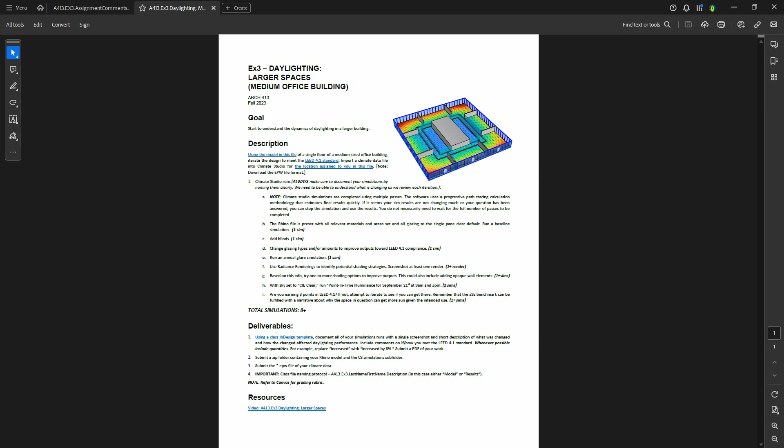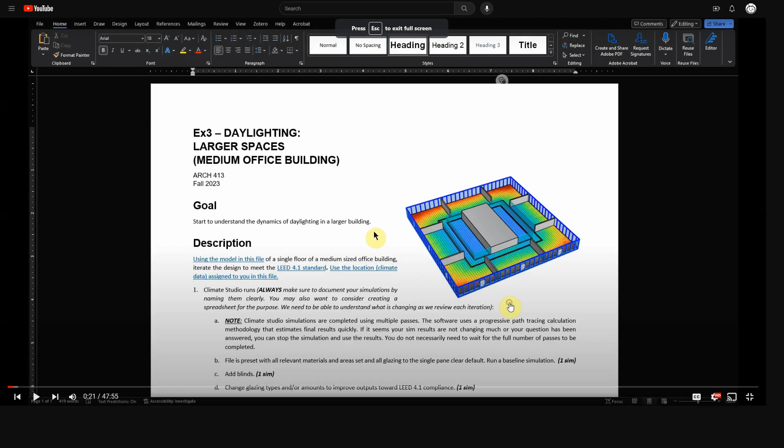What I've done to try to make this straightforward is two things. I am giving you every week as detailed as I can a set of assignment instructions, and so far at least I've given you a video you're supposed to watch beforehand. This is why I'm somewhat confused, because if I look at this video, I start with the assignment and go through and talk about pretty much everything in detail.

And I actually do it. That was the point, I'm actually doing a step-by-step run through this assignment, so you could just open up your file and do this with me, and you should do really well if you did that. So you have to let me know why that isn't working or what's confusing about that.

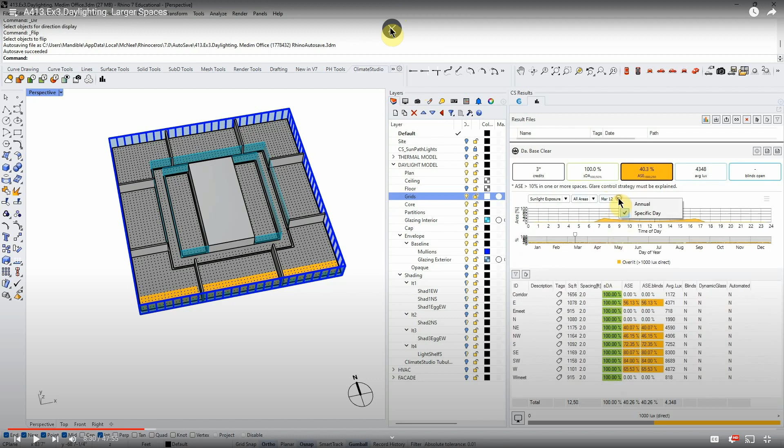Having said that, let's just try to dig into this a little bit. And the other thing to remember is that every assignment already has a grading rubric with it, and these are directly tied to the assignment itself. So if you look at these both together, it really should help you understand what's going on.

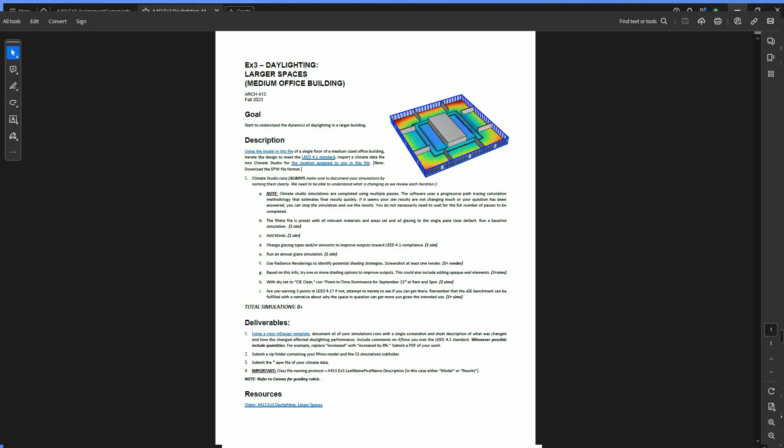The idea for this class, I think the only way it can really work well is if you watch the video before class and try it before class, or at least look at the assignment and see if you understand what you're going to be doing. That way you can ask me these questions in class, and we can have a back and forth discussion. That's what it's supposed to be, right?

If people aren't watching the video and trying it before class, then I am showing them something in class, and I'm not even going over the whole assignment because I've already done it on a video, and I figure that's really boring. Then you're missing important information, I think.

So I may decide to switch that in mid-semester here, because there are other people who are not watching videos before class, so it's not completely working the way I thought. I may adjust it, and you should let me know. I can change it, however, to help you make our class time really productive.

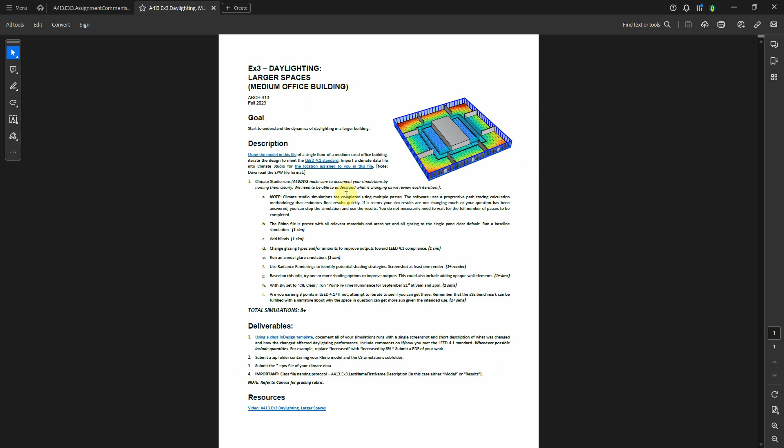Anyway, so I'm looking at the assignment, I look at what you turned in. There's definitely some things in here that are right, but a lot of it's not directly connected. I think there's maybe a source of confusion that I would understand if there wasn't a video, because you're just doing a number of simulations and they're not inaccurate.

I can tell that you know what buttons to push in Climate Studio, but they're not following this order, first of all. So I would suggest you just look at the order that's in the assignment if you're struggling with this, and just follow along and try to do it step by step. And if you're watching the video, then that's going to be what I'm doing there too. So it should be pretty clear what I'm asking for.

But so let's go through this. I'm sorry this is a little bit long and boring, but I'm just trying to answer your question. So you downloaded the file, and I try to make a goal, start understanding the dynamics of daylighting in larger buildings. We did smaller buildings the week before. You downloaded the model, good. Included this here, this is the second week I would have been talking about LEED. This is what we're doing.

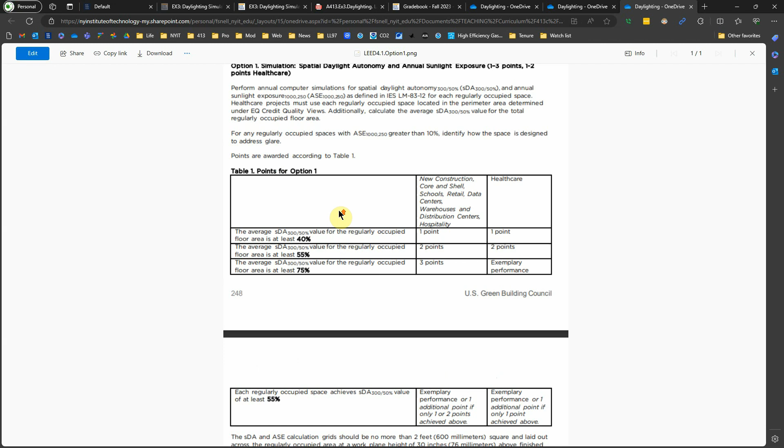This is a simple chart from LEED, but this is what we're doing from LEED 4.1. We're trying to meet the daylighting requirements, and there are two basic requirements: SDA, do we have enough sun, and ASE, do we have too much? We're trying to get 75% SDA and less than 10% ASE in all spaces.

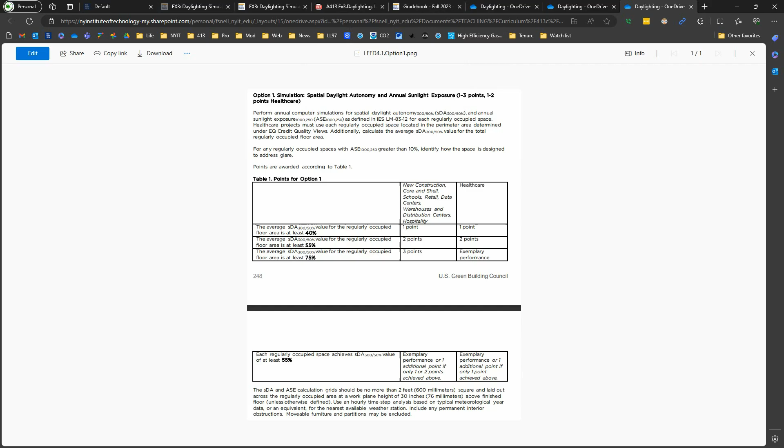So we need to see the numbers and not just the colors. That's one thing. And then, so we're going to the standards. That's always what we're doing. There's a benchmark we've got, and we're modeling to that.

I do see that you went and got your location from this file, so that's great, and I can tell you did that because you have Los Angeles here. However, you don't say anywhere that you're in Los Angeles. You don't make that clear. Remember that this is a presentation, not really notes for me. It's supposed to be a presentation where anybody could find this on the street and understand what you were doing. So it should be clearer that you're in Los Angeles, with a map or something, some way that we know what's going on here.

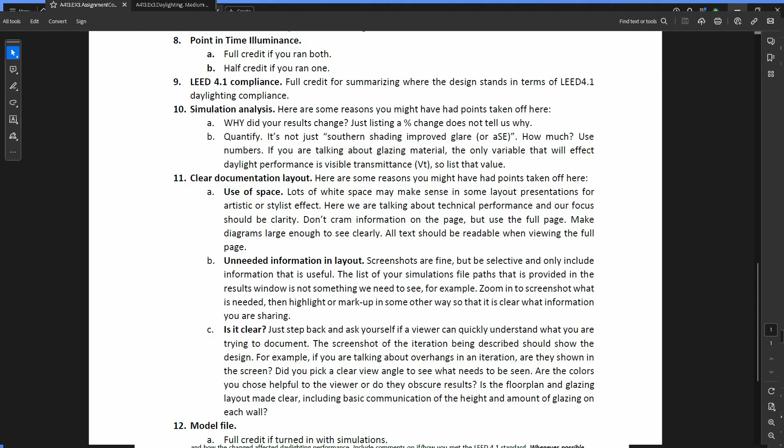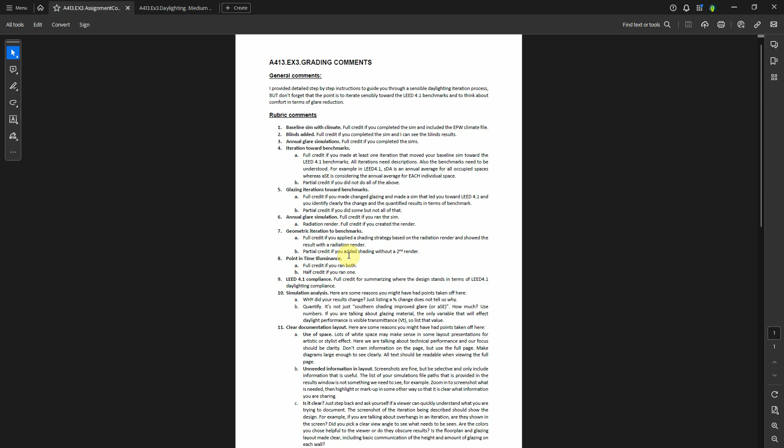I'm burying you guys in documents, so maybe that's too much. Every week, I'm not always going to do this. I'm not guaranteeing it, but when I'm grading, I've been making a list of comments. So rather than repeating the comments over and over again, I'm just making a master list and giving this to you on Canvas so you can see why I might have taken points off.

But one thing that's being repeated week after week is this documentation section. I'm actually being really lenient in grading documentation, but it's important that you start thinking about this. Definitely, this is really important.

Unneeded information in layout—if there's stuff that's not needed, that's just there because it was easier to screenshot, or if you don't understand it, never include anything in documentation that you don't understand, because then somebody's going to ask you a question about it, and then you really lose all credibility when you can't describe the thing you actually put on a slide, right?

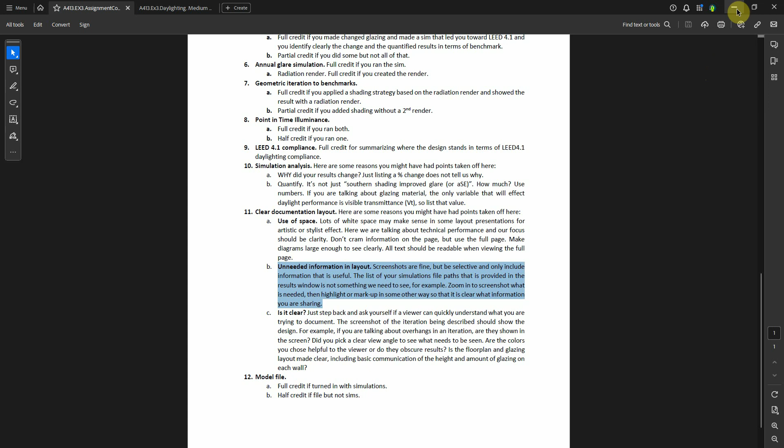I've got this list of simulations that I'm expecting to see, step by step. I would go step by step here. It seems like maybe you were confused when I say you're supposed to do a baseline. Let's see—it says here, run a baseline simulation. That's the first thing you're doing. And I'm thinking you're going, well, which is the baseline of what? I don't understand which one I'm doing, so I'm just going to add a bunch of stuff in here.

That's where if you would have watched the video and looked at the assignment before class, which is what I'm asking—no books, no reading assignments, that's the assignment for the week in addition to whatever exercise you're working on from the previous week. If you would have done that, I think you would have understood what I'm saying here, and what's spelled out here is that this is a LEED 4.1 simulation we're doing.

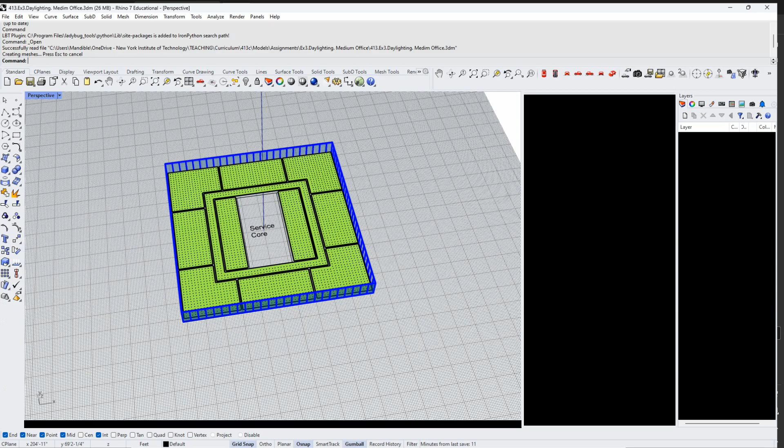So how do we do LEED 4.1 simulations? Well, that is this—there's a very specific way we do it. We go to daylight availability, and in daylight availability there are a number of options we could pick, like daylight factor, but we're picking LEED 4.1.

If I look at the LEED 4.1 runs that I did, because I just did this assignment in a simple way, here's my LEED 4.1 analysis, here's SDA, here's ASE, the things I was talking about, here's my credits in LEED. I've talked about this in some detail, but we could talk about it again if you don't get it yet—how this works, because for example, this is an average over all spaces, and this is for individual spaces.

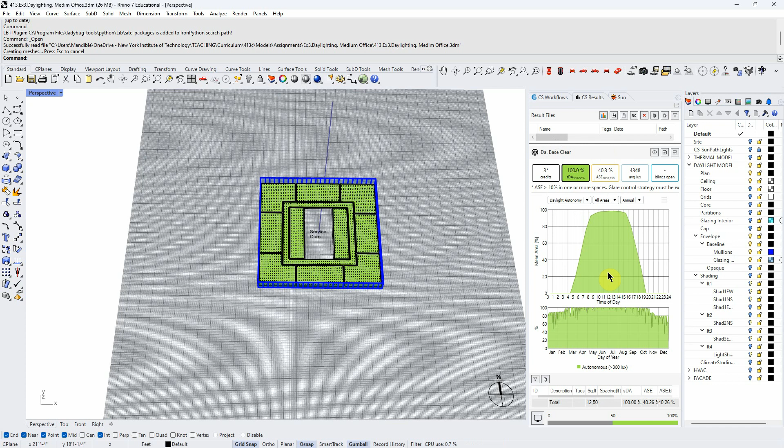So you would want to come down here and look at the percentages for individual rooms. That's not made clear in the assignment because that's things we're covering in class, and the assignment would be 50 pages long if I talked about every single thing in that detail. So my point is, if we go back to the assignment instructions, you were supposed to do—and remember, I did it in this video, I went step by step—if you follow that process, I'm not going to abandon you.

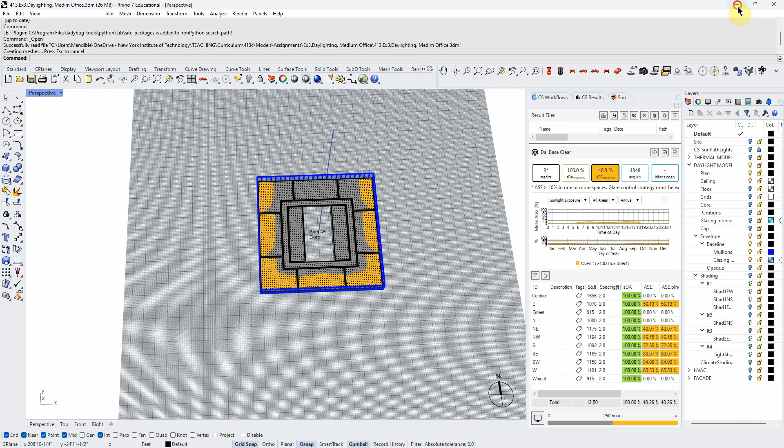So it's kind of clear from looking at this that you're not getting the baseline of what we're doing, which is fine. That's why I would hope you'd watch the video and then talk in class about it. You've got to be interactive with me with this stuff, or you're going to be confused.

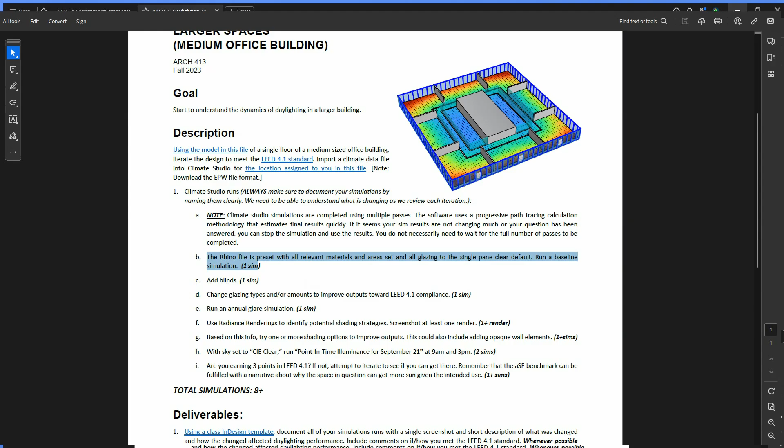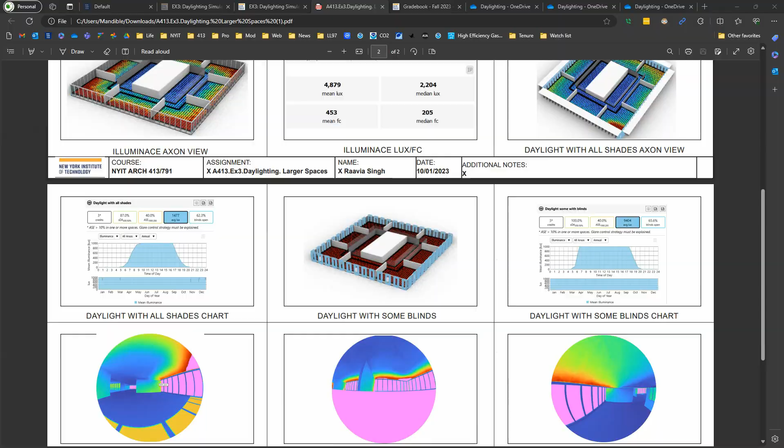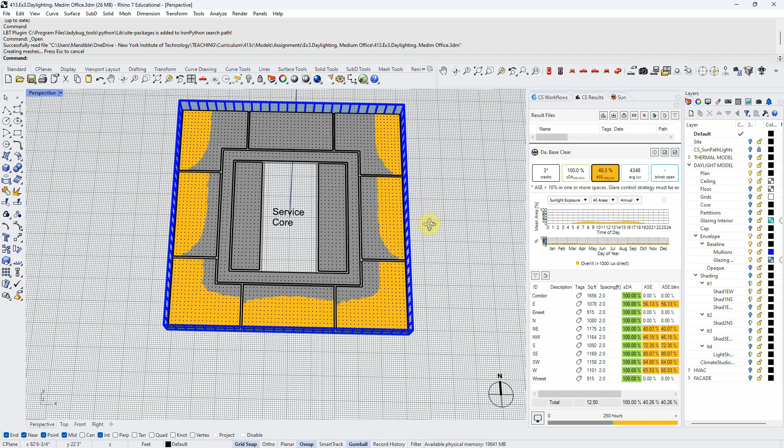What I'm looking for here is that you would run a baseline LEED analysis with the building just like it is, no shading or anything like that, and come up with a value. Yours is going to be different because you have a different climate. I'm just doing New York, and that's why I picked all these different climates, just so we would have some variety. And then we get a baseline. So this is the baseline I ran, and you might look at it from here.

SDA, do we have enough sun? Yeah, we have tons of sun, but we have way too much in a lot of rooms. That was the point. That's the baseline.

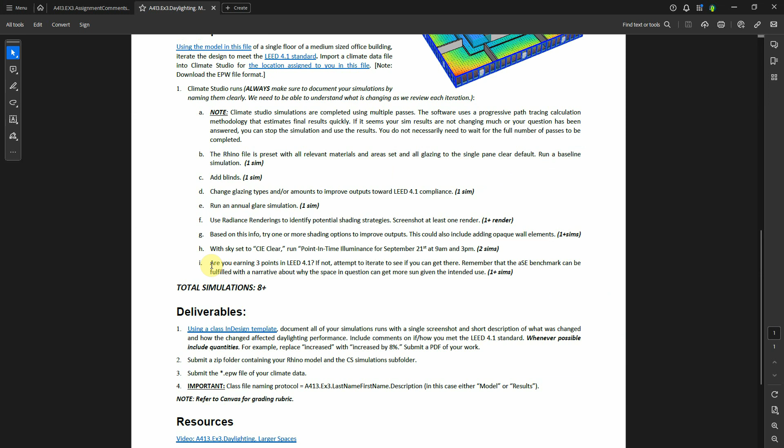And then from here, I have to improve the performance toward the LEED requirements. And that is stated here: are you heading toward LEED? Have you met the LEED 4.1 standard? That's the point of everything you're doing in this assignment.

Okay, so I would want to see, and so what did I do? And again, this is in the video: I first ran a baseline, then I added blinds, and there's a way to do that.

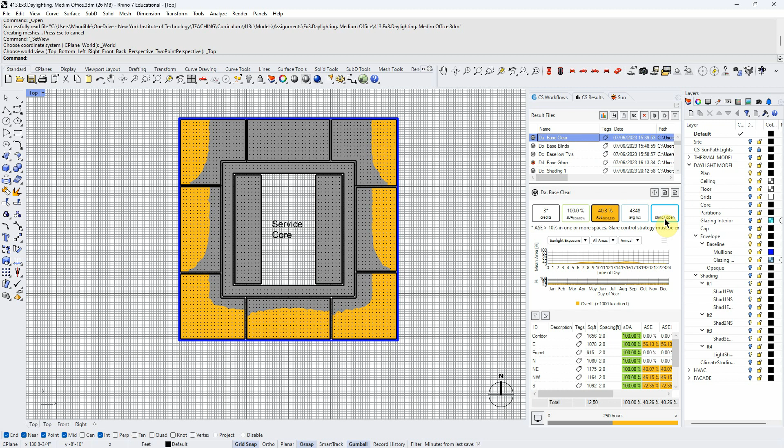I don't know if you actually added blinds or not, because I can't tell unless I see this value changing. You see here, no blinds, the blinds are open all the time. This is how, once I have blinds on, there's a percentage here.

I'll also see a percentage in the glazing sections of my building. This is telling me that these blinds are open 71% of the time. They're only open 39% of the time here in the south, which means, yikes, I've basically got the blinds closed half the time. That seems kind of like a dumb approach, right? That's the sort of idea here.

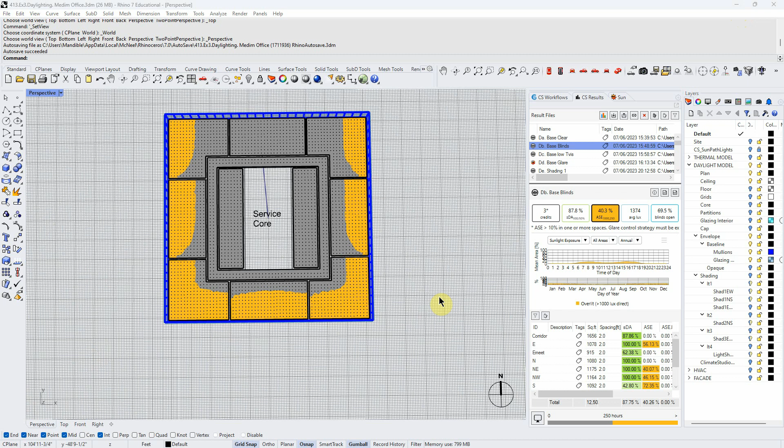So if we go back to this, well, let me say another thing. I need to see these numbers here to understand if I'm trying to head towards 75% as an average, and everything less than 10% in individual rooms. I need to see numbers here, right? And that needs to be part of my documentation.

And it needs to be part of your understanding so that you're iterating to change these numbers in the direction we're trying to go, which is to have this not go down too much, and this go way down.

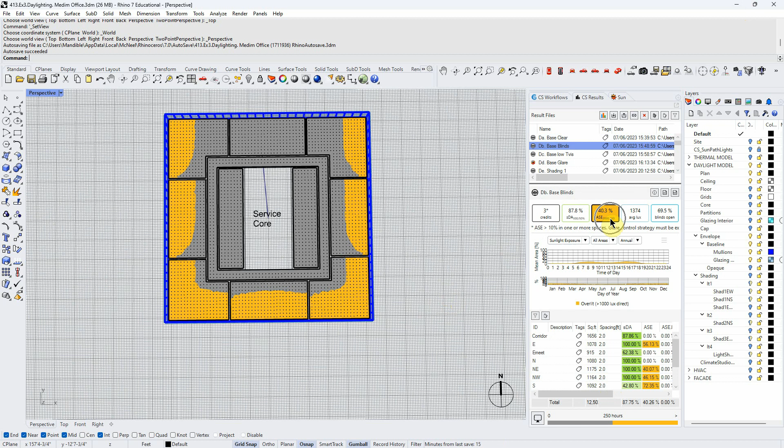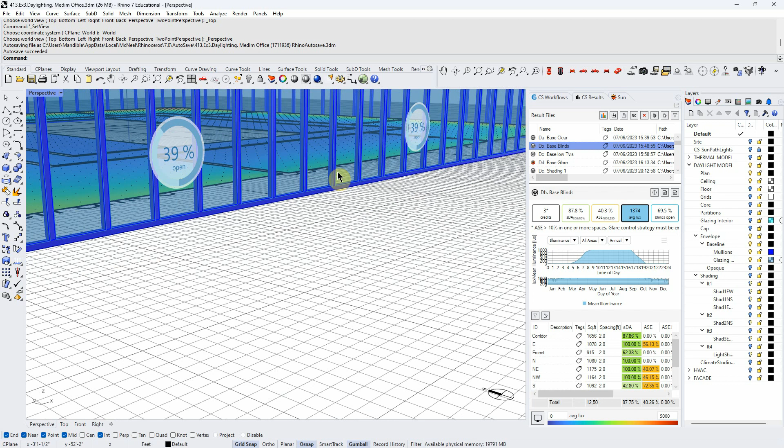Now, illuminance would be here, but we're not talking about illumination really at all in this particular assignment. Illuminance is about how much light, so how much lux, that's the unit in the metric system, is hitting this work surface. I don't know if you remember that we created a work surface that's off the ground. That's because we're saying this is where we want to study the amount of light, because this is where the work is going to be happening, like desk height in this example.

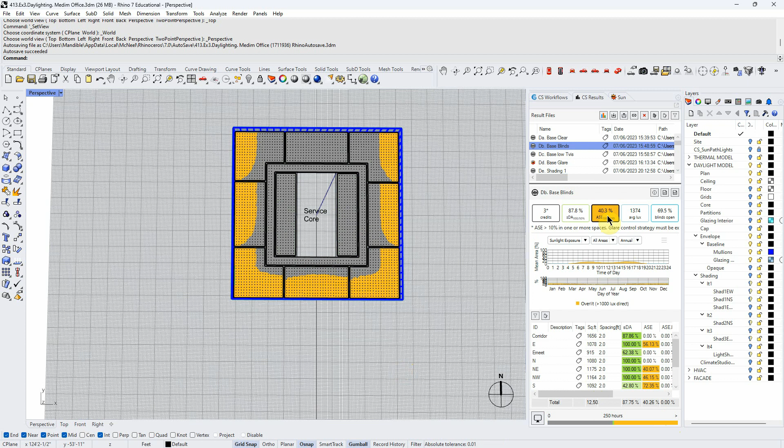So this is interesting information, and definitely graphically it's something that's more nuanced, and I can change it by adjusting this range down here, more than these two. So I might want to use it for something, but it's not part of what I'm asking for here, at least not initially. So I'm saying I want you to do a baseline simulation with single pane clear glass.

That's another thing you can ask me about if you don't know what it means - it's a specific kind of glass we would use. I'm trying to use something with very high visible transmittance so we get tons of light inside. Then we add blinds and see what that does. We're trying to iterate toward this LEED 4.1 benchmark - add blinds, then change the glazing types and/or amounts so we could make the windows smaller or larger, or just change the material to improve our outputs toward LEED 4.1.

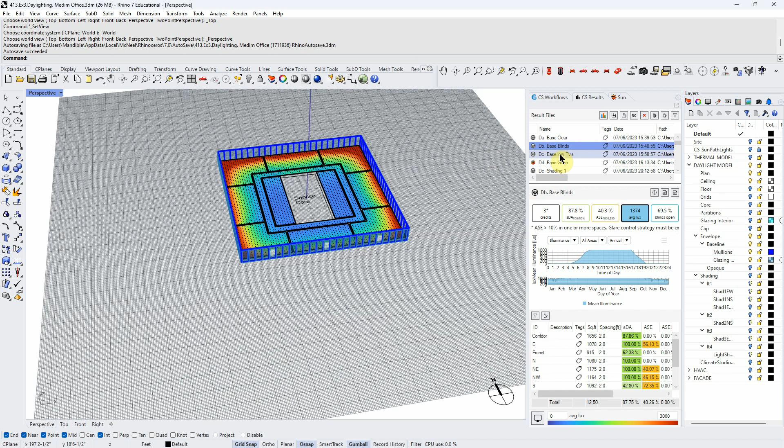So in my version, that meant initially I changed to a low T-Vis glass. If I look here at this one with blinds, I have glazing that's 91%, a T-Vis of 91%. Then here I changed it to low vis, and in this run I had 36% T-Vis. That means only 36% of the visible light is coming through the glass - that's what we're measuring with daylighting.

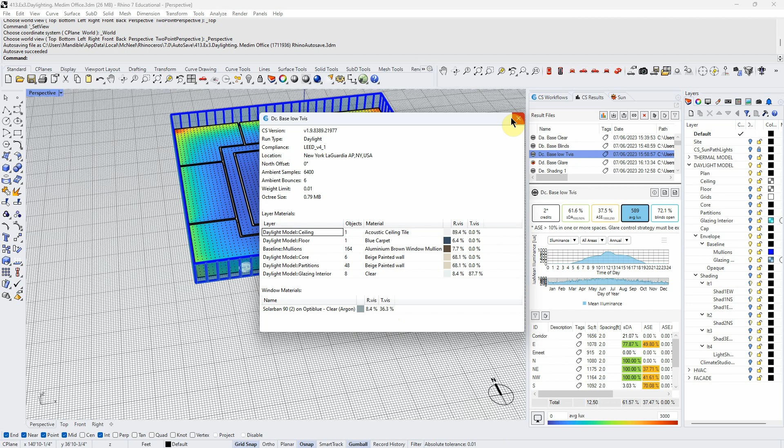So just by changing the glass, I drastically changed between these two, right? Well, it's not actually that drastic, but it's a lot in certain rooms - I take that back, it's not a lot in certain rooms. It's a lot in terms of our SDA.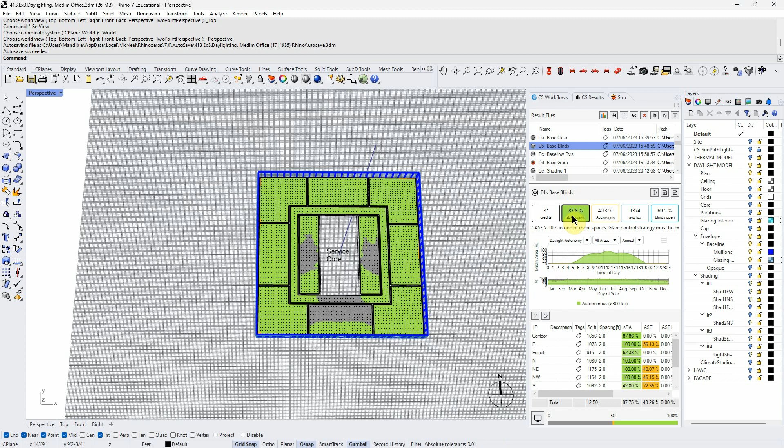So for example, here's my run with the blinds, and I've got an 87% SDA, 88%, and 40% ASE totals, with some down here on the south side really high - 72%, 80, 84.

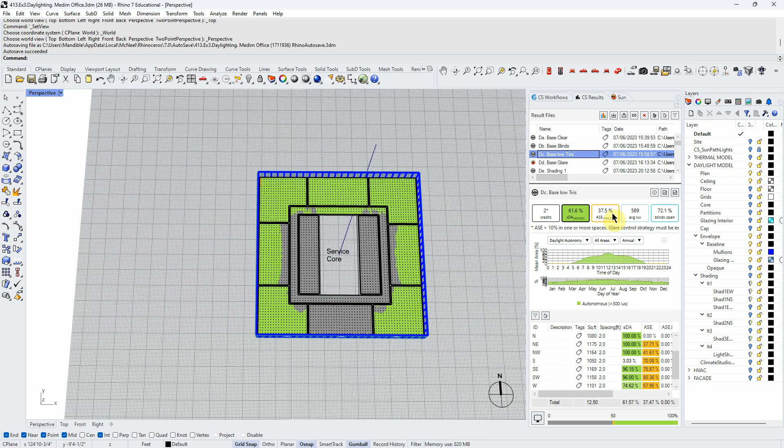I come here with a lower T-Vis - now I've actually gone well below my 75%, so I've actually cut back the amount of daylight coming in too much. And I've improved this ASE a little bit, but not really enough, so that was a bad move going from here to here. If you don't understand why, that's something else we can talk about separately.

But the point is, that's what you're doing here - trying to, let's go back to the assignment. We're saying we are changing the glazing types or amounts to improve outputs toward LEED 4.1.

So I would want to see clearly that you changed the glazing, told me how you changed it, what the T-Vis difference was, and then showed me the difference in the numerical changes in the LEED 4.1 outputs here.

What you did was, first of all, you have glare, you have illuminance, which I think is point-in-time illuminance - I don't really know for sure because you don't show me anything I can analyze that with. And then you might have changed glazing somewhere here. I can't really tell, it should be in order. I don't really see that you did, so maybe you didn't understand that.

And so I don't really see anywhere that I know you did a LEED 4.1 analysis. These could all be point-in-time illuminance renders, and it looks like it is here. So I think maybe you're not understanding the LEED part of this.

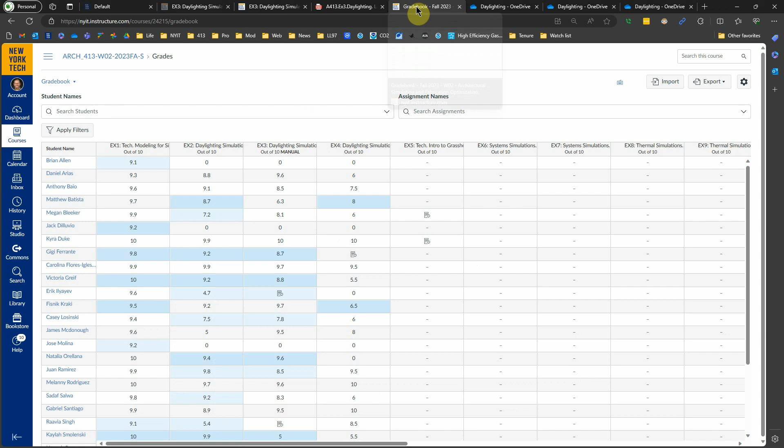So that would mean then, if I go back to the assignment I'm giving you - I may not be able to give you full credit for that because I don't know if it's an illuminance or a LEED 4.1 analysis.

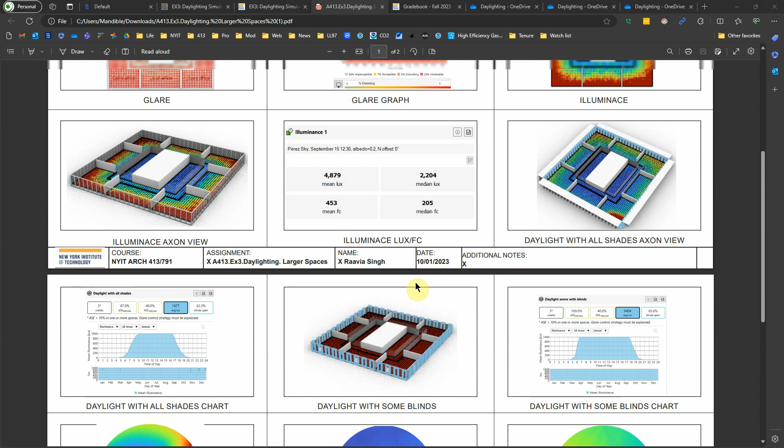Okay wait, let's see - now I'm seeing that you do have blinds on here and you are running a full daylighting analysis here. I don't know which one this is connected to, and it's unclear to me because we have now this here and this here. Which one is this connected to? Is it connected to this one? It's very confusing, and I don't see any that didn't have blinds.

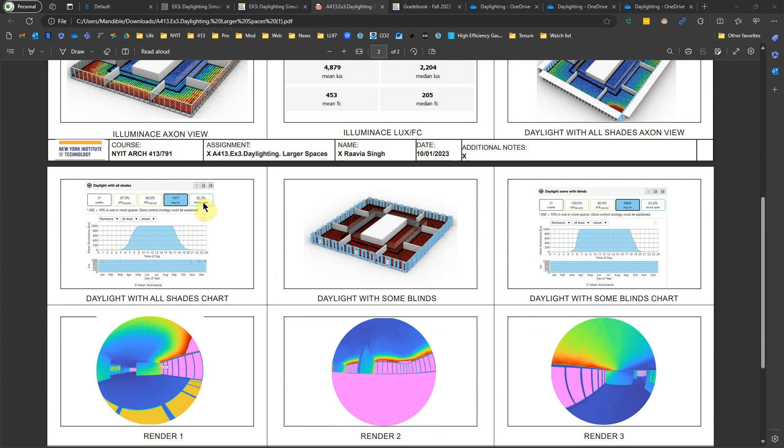So I'm only seeing blinds. As I'm grading this, I'm confused as to how to grade it, and also confused as to whether or not you're getting it. You did run an annual glare simulation, so I can come back and see that you did that - okay, she's got that here. But the idea with this was supposed to be, let's see what it says.

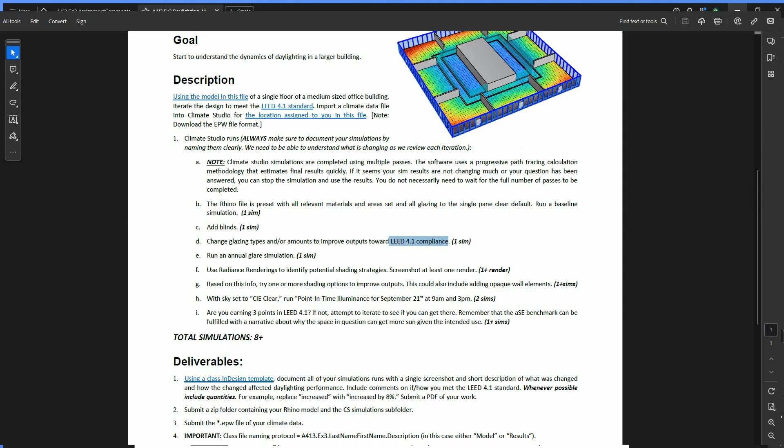So you're supposed to run an annual glare simulation, and we talked about that. You ran it, so I would give you full points for that. But then you're supposed to use a radiance rendering to identify potential shading strategies, screenshot at least one render. I know you did do that, which is great.

Render one, render two, render three. What is the point of them though? There's a whole idea behind these renders being very specific. This range of color is just something we preset, and what we want to see is the sun here. So we want to change that range until we can see an orb of the sun.

That's covered in the video, and I've talked about it in class. I'd be happy to talk about it again. The idea is supposed to be, let me show you in mine, that when I get down to it, here's a glare analysis.

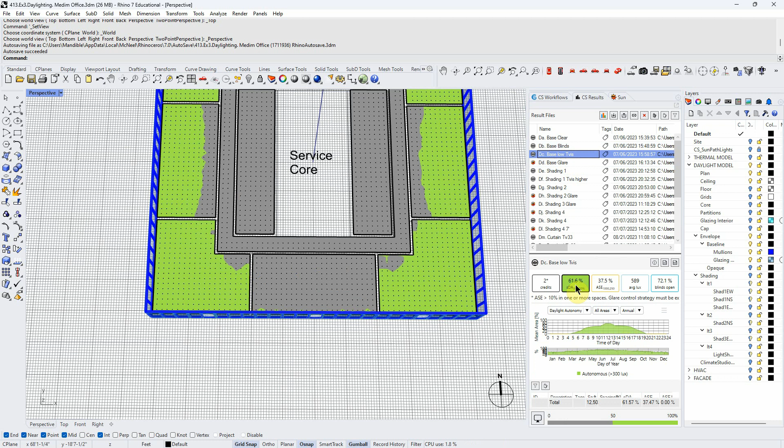If let's say I'm on a baseline glare, what's the whole point of the glare thing? Let's go back to this. We could say I've got enough daylighting, or I've got too much, but I'll deal with that in whatever way. But even if this was meeting the standard, it still might be uncomfortable in the space because of glare. So we have to do a glare study.

And if we do that, we're looking at these little view sheds. Basically, this is like I'm looking in that direction, I'm looking in this direction. So the way I would use this is to go in and pick a time where I want to look at where the sun is with a radiance render, and create a strategy for how I'm going to block the sun that's there at that time.

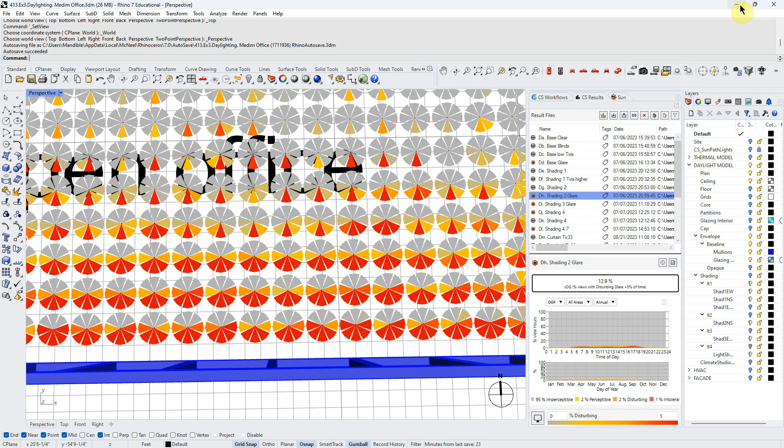So what you're showing here is that you know how to do a radiance render. Good job. But you're not showing me that you know what to do with it. So that's something I would take some points off for, not very many probably.

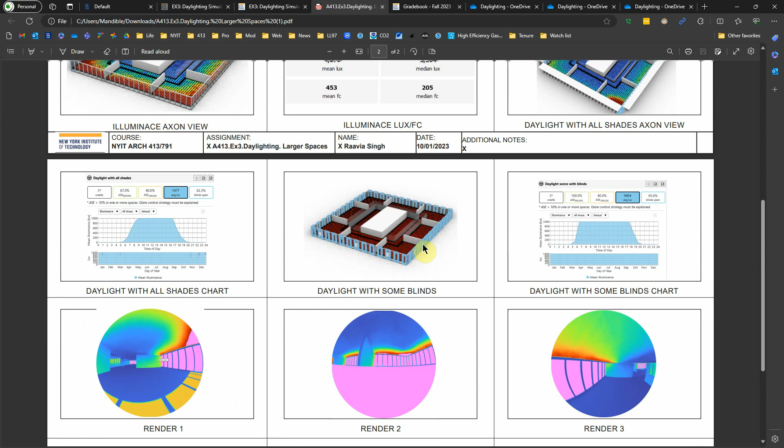Then the big one is that I asked you to do a point in time illuminance, two of those runs. I'm not even going to talk about that right now because this is getting really long. I'm sorry. There's a reason why I asked you to do that. I think you did do them, but you didn't show when they were done. A point in time means you're picking a specific time because we're trying to study a moment in time. And I don't think this one is, because it looks general to me.

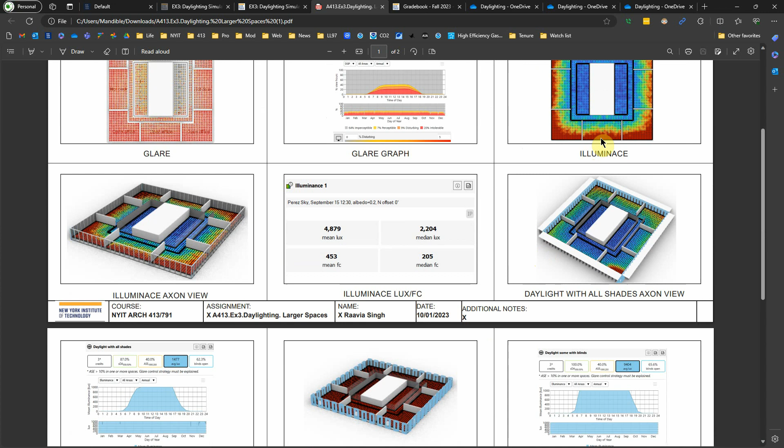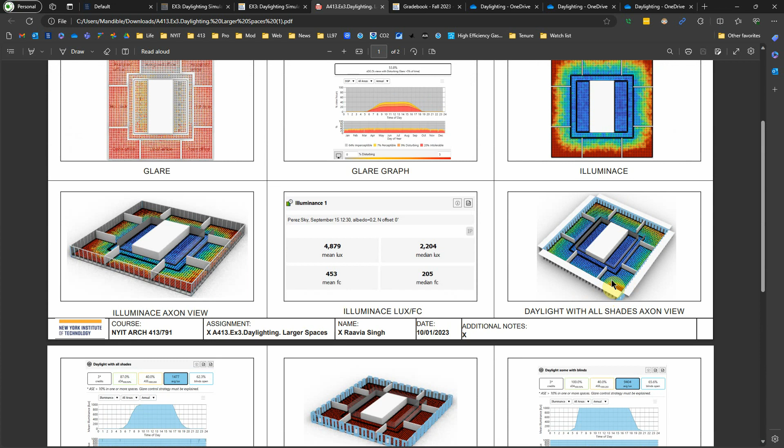This one looks like a point in time to me. I bet this was with a specific time, like a date and a time of day chosen. But again, that was supposed to be sort of at the end, and it wasn't. Yeah, here we go again. It wasn't part of

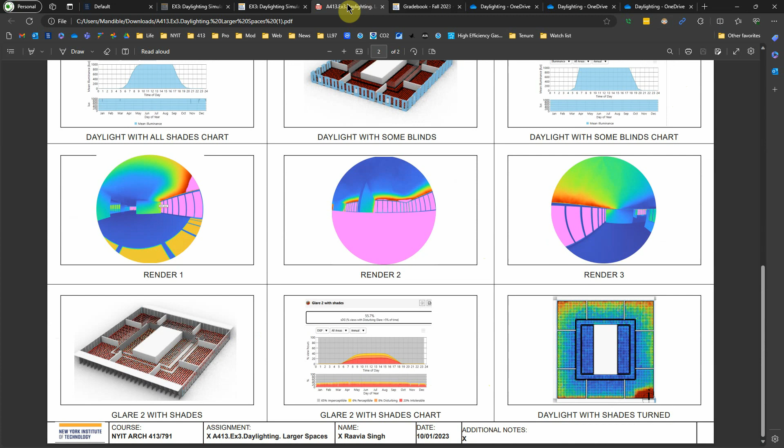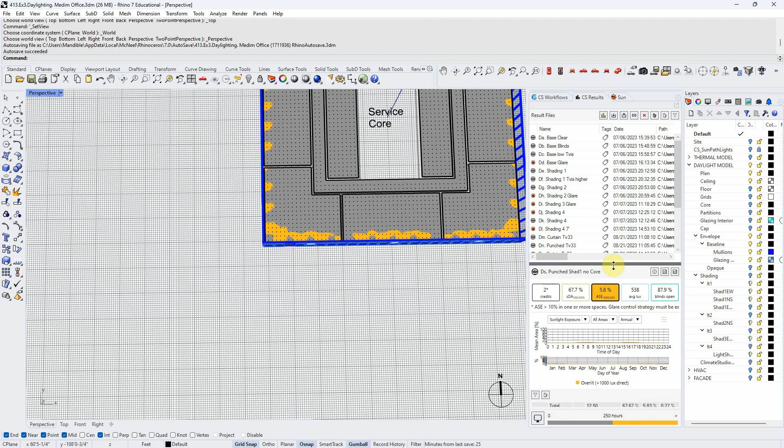the LEED analysis, which again, at the end, what we're really saying is did we meet LEED. And for me, I start getting down here and at this point I'm not quite in the SDA. I could go and adjust my glazing or something to get that up to 75, but I'm doing really well in my...

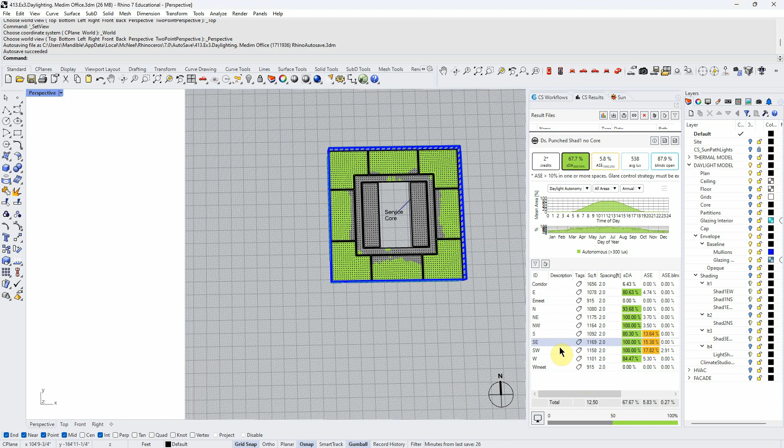Sorry, I'm trying to find it, there it is. Sometimes it's hard to find that little toggle to get it to activate. Oh, it was just fully extended, so I have to do this. I still have some spaces that are over 10%, but I know I can go fix those.

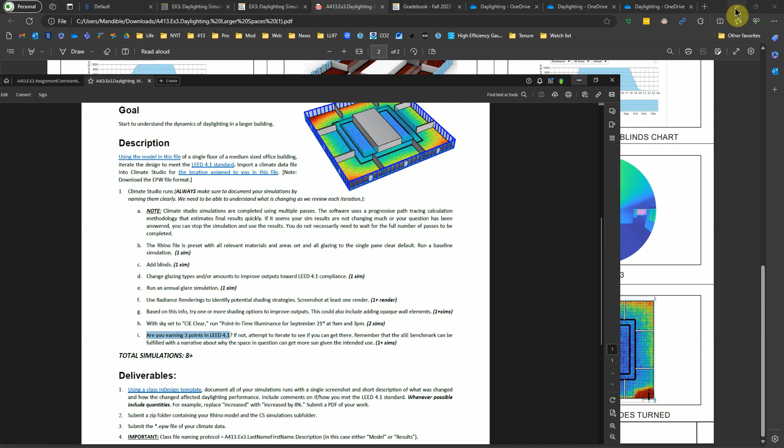Anyway, I wasn't trying to—you don't have to get all the way to LEED 4.1, but you need to say something about where you are at the end. And if we go to what you turned in, there's nothing saying anything about where you are in terms of LEED compliance.

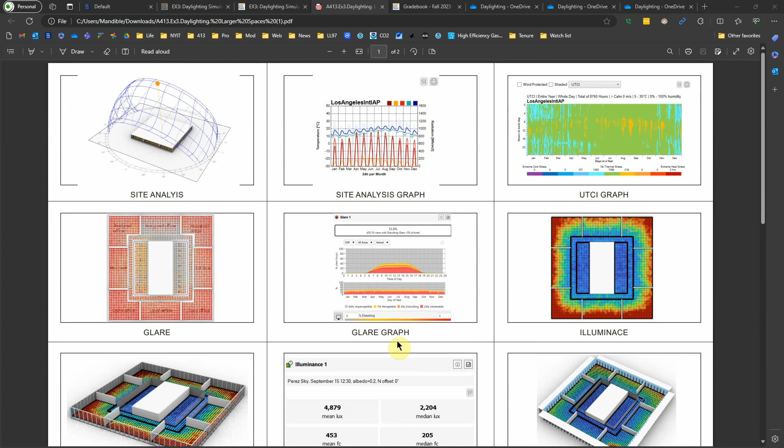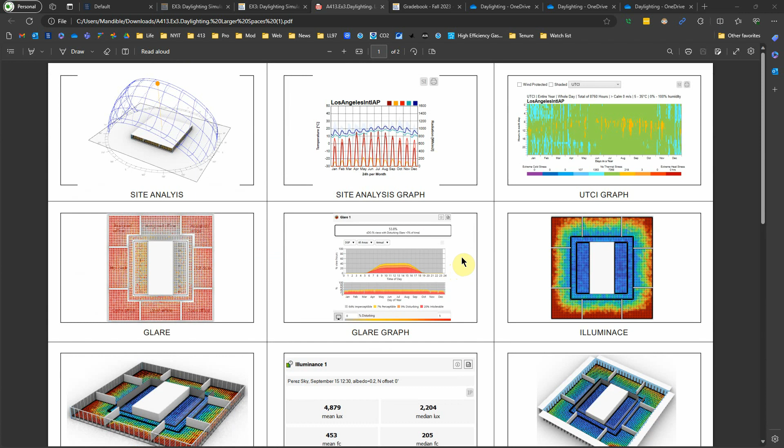So that's a long way of saying that if you watch whatever videos I provide, I know you're busy, but if you do it before class and come asking questions, you're going to get these done by the end of class almost, or you're really going to be in good stead, because you've got to be able to ask me these questions beforehand. There's nothing you're doing wrong, you're just not getting the information you need, and that has to do with you putting in effort at the right time. All right, I hope this helped. Keep talking with me, we'll get it figured out. Talk to you in class.